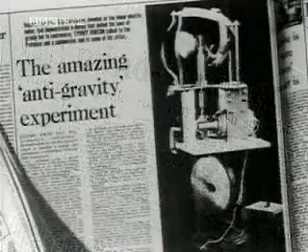One of the things that makes Eric Laithwaite's finds controversial is that he discovered what appeared to be a force that negated the weight of the gyroscope, or seemed to make its mass vanish. So had Laithwaite come up with an anti-gravity machine, a device which could rise in the air without a source of energy to propel it.

The issue has never been fully resolved to anyone's satisfaction. Most people believe it absolutely didn't work, and others believe that it worked very well, and there was a conspiracy of some sort to cover it up.

Ezekiel is describing a flying, spinning, glowing, metallic object that ascends and lands in front of him. In the modern age, what we see are flying, glowing, spinning metallic objects that ascend and descend just like the objects that are described in the Bible.

It's not an illogical conclusion to assume that these craft that we see today may be the exact same craft that they're describing in the Bible in ancient times.

Their construction being, as it were, a wheel within a wheel. When they went into any of their four directions, without turning as they went.

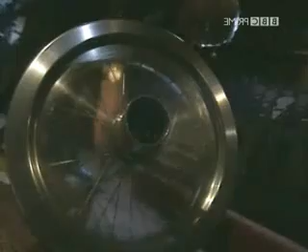The four wheels had rims, and they had spokes. And their rims were full of eyes roundabout.

What I believe he's talking about is devices, mechanical devices. And in the time that he was discussing this, there was nothing mechanical. The wheel was about the most sophisticated device that they had.

There is no way I can pick that up with one hand, not above there. I'm not a strong man, I don't into weight training. But when it's spinning, it's another matter. Release it, and it begins to climb almost on its own. No strain on my arm at all.

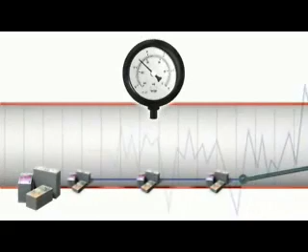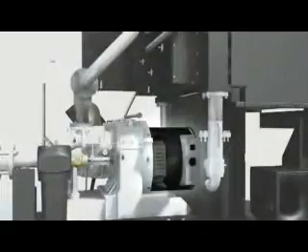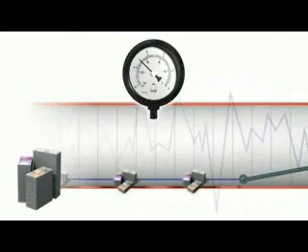While variable speed technology has been used in industry for a number of years, the limit of this technology has always been in the inverter duty induction motor. Restrictions on operation of the motor have prevented the variable speed compressor from reaching its full capability. With the Nirvana hybrid permanent magnet motor, the full capability of variable speed control is unlocked, resulting in unrivaled reliability and efficiency to the compressed air system.

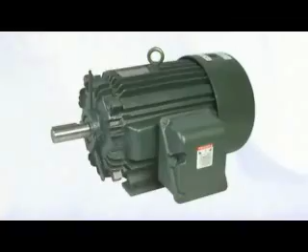To fully understand the benefits of HPM technology, it's essential to first understand the induction motor and how it operates. The stator has multiple slots, which are filled with winding coils in the form of a span. In a three-phase motor, one third of the spans or coils are dedicated to each of the three phases.

The rotor of the motor is made of steel laminations stacked on a steel shaft, with a cage of bars and rings cast in to form poles. The rotor shaft is supported by bearings and rotates within the motor stator.

The induction motor works by electrical power, creating electromagnets. Attraction of the rotor to the stator coil produces rotational movement. Direction and power is dependent on the stator coil firing order, the strength of the flux, and the amount of rotor slip.

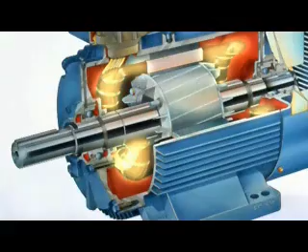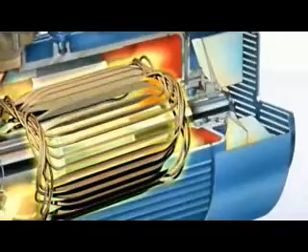The long stator with overlapping windings at each end not only restricts application of the induction motor, but also introduces a significant failure risk, resulting from overlapping coils, which are subject to hot spots and insulation breakdown. Excessive currents are required to initially magnetize the rotor and start rotation. Frequent starts can rapidly overheat the motor.

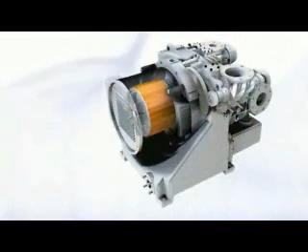In contrast, the compact synchronous HPM motor, thanks to the permanent magnets, avoids high starting currents, delivers constant torque, and utilizes simple stator winding coils on salient poles.

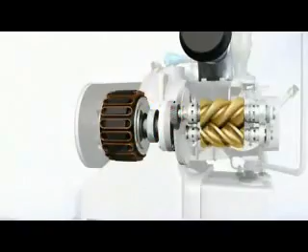Enhancing reliability, the compact HPM motor mounts directly to the compressor unit shaft. This eliminates the need for motor bearings, reducing the number of moving parts in the system. Additionally, this unique design ensures alignment of the motor and air end, and does not require flexible couplings or gears, which wear and reduce reliability.

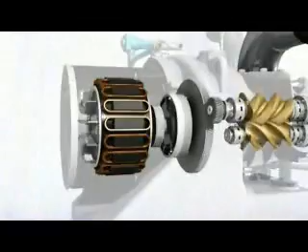Nirvana's constant efficiency design allows the motor to reduce speed and power consumption without losing efficiency. Furthermore, Nirvana's unique capabilities allow the machine to start and stop as often as required, enabling the compressor to deliver the smallest volumes of air efficiently.

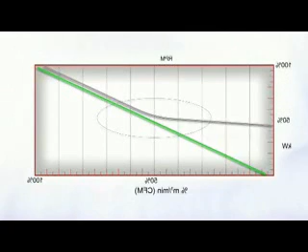Induction motors lose efficiency as they reduce speed to part-load the compressor. This forces many competitive machines to operate at less than optimal conditions through the majority of the applied speed range. In order to protect the induction motor, competitive units frequently continue to operate the machine unloaded when air delivery requirements are below minimum. This approach puts unnecessary wear and tear on the system and wastes electrical power and resources.

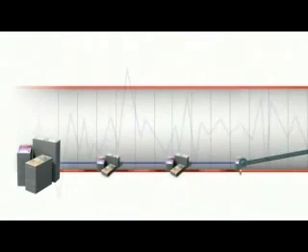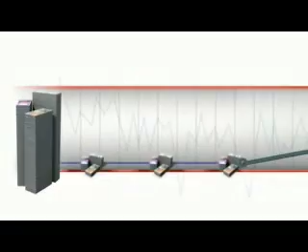The Nirvana HPM synchronous motor improves balance in the power supply through a consistently high power factor, harmonizing speed to the drive frequency and eliminating slip, thereby reducing billing rates and playing an important role in overall facilities management.

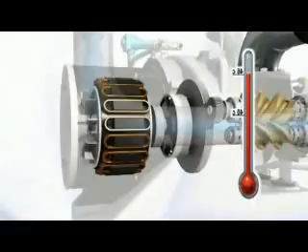Unlike standard motors and frequency drives which are rated at 40 degrees Celsius, the Nirvana HPM motor and matching drive are conservatively rated to operate continuously at temperatures of up to 46 degrees. The Nirvana hybrid permanent magnet motor delivers superior value through leading innovation.